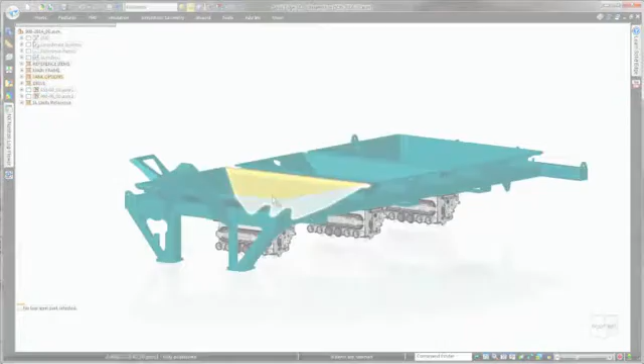Tebotech is a South African manufacturer of agricultural machinery and is the sole developer and manufacturer of Equalizer agricultural implements. For more than a decade, they have successfully used Solid Edge to produce mechanized planters on offer to domestic and international markets. We'll see some of the straight brake sheet metal capabilities used to create a safety guard that encloses the chain and gears of a planter's meter box assembly.

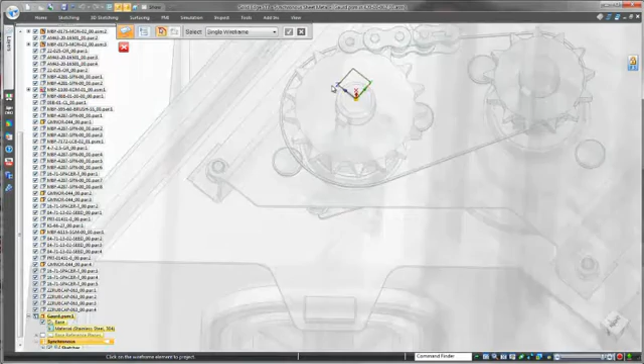Solid Edge excels with large product structures, and designers can work efficiently in the context of thousands of surrounding components by quickly focusing on a subset of the overall product. Here, watch as construction of the safety guard begins as a sketch, referencing geometry from the adjacent product structure. Once we have a region encompassed by these curves, we select it to create a sheet metal tab. Solid Edge automatically assumes that a tab is the basis for sheet metal work, so no specific command is needed.

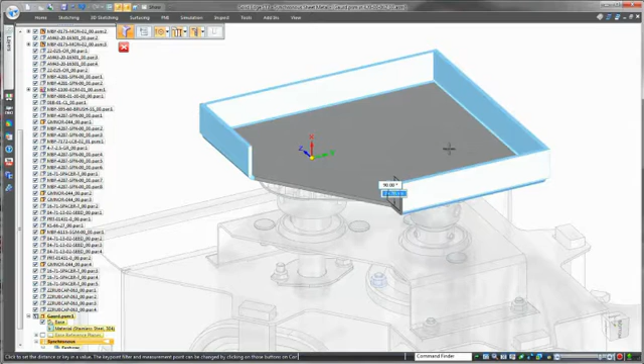Continuing to lean on the inherent intelligence within Solid Edge, we'll create 4 flanges by selecting and simultaneously dragging appropriate thickness faces using a corner point from another component to define the flange length. Again, work directly with geometry. That's creation in Solid Edge. We'll quickly define a jog to prevent interference. Solid Edge commands are intuitive and fast.

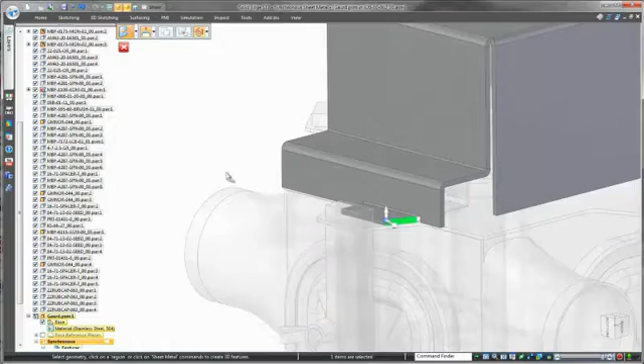Partial flanges can be defined and customized via the innovative heads-up command interface. Design intent is incorporated by relating faces. When flange sides need to match those from adjacent components, the handy radial menu initiates a simple sequence of picks to get the job done. Solid Edge makes easy work of reorienting and extending flanges, often removing the need to measure angles and distances.

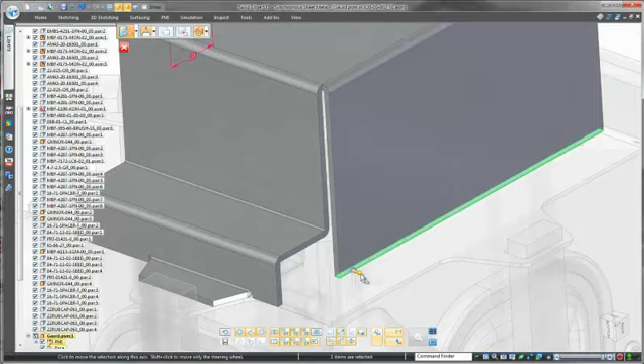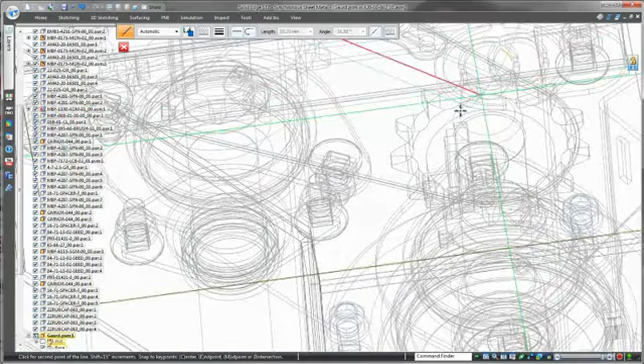For visual face modification, the handy steering wheel is always available. And when driving dimensions are necessary, it's easy to place them on the 3D geometry and change them as needed. Using surrounding geometry, creating sheet metal features like this dimple is fast and accurate. For manufacturing purposes, Solid Edge flat patterns always show the most efficient cut sheet size, and that's great for nesting.

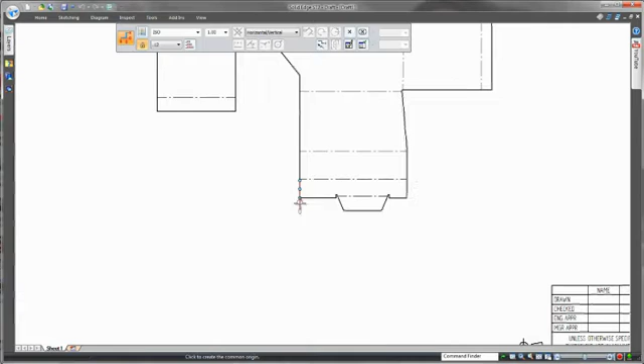The Solid Edge drafting tools facilitate creation of dimensioned drawing views fully associative to the model. Note that as we close the drawing and return to the assembly, the guard is placed in all 3 locations in the meter box. Solid Edge contains a full set of sheet metal construction commands. Watch as a rectangular to circular plenum in the blower fan assembly is lofted between existing parts.

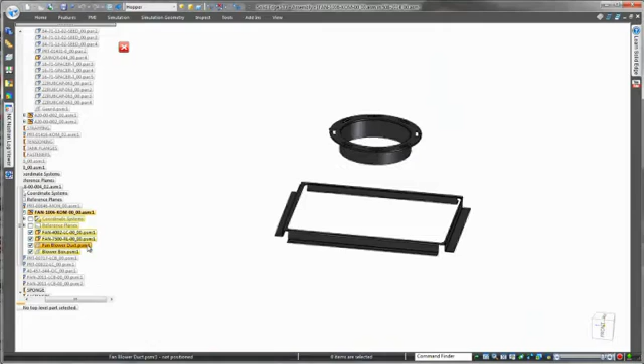Another strength of Solid Edge is the ability to wrap sheet metal around a solid part. This conversion of solid block into sheet metal is especially useful for complex shapes, as solid modeling is often faster and easier. Now that's productive. To integrate with your CNC machinery, Solid Edge flat patterns can be exported into a DXF format with intelligent layer control.

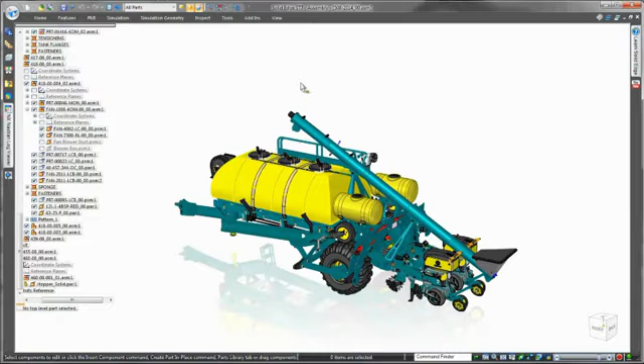Direct interaction with surrounding geometry, coupled with industry-leading design tools and innovative modeling capabilities, makes Solid Edge the choice for companies looking for an edge over the competition. Solid Edge. Design better.